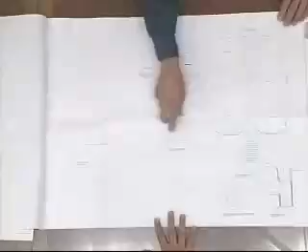And then we went to the deck, which sits out 310, it's 11 feet 10 inches. Here's the detail, but we'll go back when we look at the elevation real quick. My brother and I looked at it the last couple days, and we took Jim's advice and brought the roof out over it. So it's a 6x6 post with 2x picket rails to match the bottom, with a curved rail on top. It's 3 feet 6 high.

As the post comes up in the front, the beam that goes across, we tried boxing out the eaves and it just didn't look right. So we're just going to keep it open rafters on the inside. This beam will probably be like a 4x10, so we wanted it to read like the lower level. We brought it down to about 4 inches, so this beam will just read like 6 inches like the other ones, and it'll be kind of like a 1x piece of fascia over the front of that beam. Then we have the corbels, and the beam stops here, and then you see the edge there. So let's see.

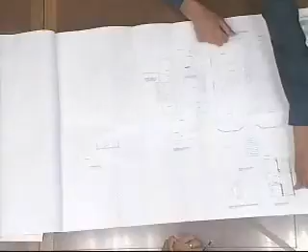Is that pretty much the last sheet on this page? Well, the last couple sheets are just all the elevations and then the solar sheets. Since it was for final, we put in the solar site plan and then the solar elevations for that mod.

If that's all for your presentation, I'll open up public comment. Is there anyone from the public wishing to speak on this project? Seeing nobody, are there any letters? Yes, Mr. Chair, we have one letter of opposition from Ms. Paula Westbury. Okay, I'll close public comment and return it back to the board for questions of the applicant.

Mr. Zimmerman: I think when we're talking about putting the posts in, we were going to try to pick up some detail instead of just the corbels matching, and we can do this scroll work underneath if you want. Yeah, these seem really small in comparison to what we got down here.

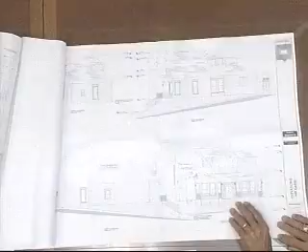Are you going to put one going in both directions? Yeah, actually we've got to erase some. They're really small. I'm just wondering if those could be a little larger so that we can see the detail better. Okay, well we can make them proportional because this is like an 11-foot, and this is just going to be like a 7-foot. I think that's what we sized them by, so we can make them a little bigger.

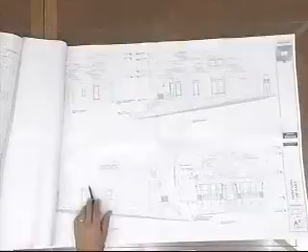Right. I have a question. The bracket that's here, how wide is it? And then the brackets that are here, because these are existing original from the house, how wide are those? 1.5 inches. The existing ones? They're not 3 inches or 2.5? No. He actually, I think he drew - I think he'd dimension them there. That's the bigger one.

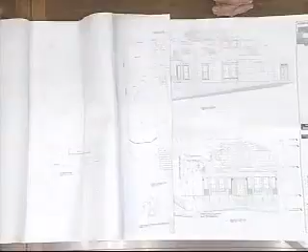Excuse me, there are two different kinds of brackets. There's the lower profile bracket that sticks only forward - that's like 2 inches. But these with the holes in them are 1.5 inches, because I had to recreate several of those that had been destroyed, and it was 1.5 inches. 2x8, 2x12 vertical grain redwood, but it comes out to 1.5 inches, 1 5/8.

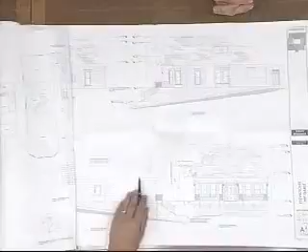I guess I had another question. Looking at this connection right here, the way this is resolved, and the way that this is resolved, and then I go to this point, how there was basically a board, a horizontal board in these brackets. I was wondering if you looked at a way of somehow getting a bracket or some kind of detailing so that this kind of language was happening in this area, or what was preventing you from marrying a similar solution?

Well, we studied basically boxing the eave and pulling this all the way out and then just covering up the bottom - that's pretty much what we looked at. If you see a picture of the house, that's the way these are done right now. But then when we hipped the roof, we took them off, so we didn't box the bottom of the eave.

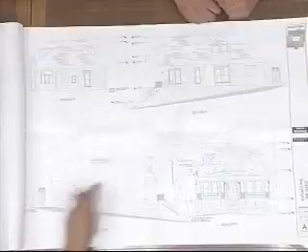Since we have corbels up underneath here, I don't know - we didn't think that it would look right to have one connecting it to the corner, because that's sticking way out from the post. It would be right over here, some kind of element right there, connecting from here to here.

Because we didn't extend the beam all the way across every post inside the corner. Does every corner have one of these? Well, here there's one that has it on 3 sides. So I know it gets really busy and fussy, but you still could have 3 of them right there without it being the end of the world.

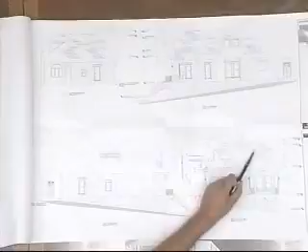But it's more to study and see how it's going to look - that was my question, if you looked into that. Well, we thought about it, but we wanted to stop the beam and just do a typical roof overhang right there, rather than bringing this beam all the way across and then soffiting underneath and putting a corbel there.

Okay, questions from anybody else? How's the sun feature being detailed?

Is that cut out? Cut out of wood, yes. I made the old one. It starts thicker at the bottom, and as it moves up, it just gets thinner. It's made out of the 1 inch board, 1-inch plywood. The rays have a V groove between each of them, with a dark stripe painted down the center. The sun is red, the rays are blue.

It's not painted, it has actual physical relief, three-dimensional. The sun sticks out a little farther than the rays, about 1.5 inches, and then the rays start at about 1.5 inches and then fade.

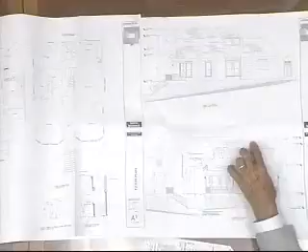Do you have a connection for the post and beam there? Maybe without getting into a metal connector, that's going to make a big difference. Like maybe put a rebar, a drift pin kind of thing. Yes, because it doesn't seem like there's a whole lot of room. We've done that on some older wood columns, but not necessarily on new construction.

That way there'd be no metal connector. Right, the other choice is you go with 4x connectors with the metal stuff, and then you dress it with 1x, and we have to box it out. But then it looks like a finished beam while you still have the structural connection, and that's someone else's call, not ours. Yeah, that would work for the 6x6, we could box it out.

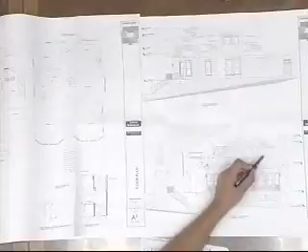One other question I had: sometimes in older houses there's a little plate that happens right here that this bracket rests on, and that's the way the siding goes into that. Does that condition exist anywhere else on this house? The brackets just go right on the siding, or the band board? It goes on this one like that belly band.

Okay, any other discussions from people? We'll go into comments. I do have a question - this has been here so many times, and I can't remember, is the color going to just match existing? Yes. And is there going to be a new roof? There's already a new roof that gets modified to incorporate the architectural changes. Okay, so those are my questions.

Thank you, okay, well let's jump into comments. Does anybody have a comment about the architecture or the landscaping? I think it's a big improvement, the gable coming out, and I think it would have been a mistake to put the flat roof there. Correct. And I like the sun coming out, I think this is a big improvement.

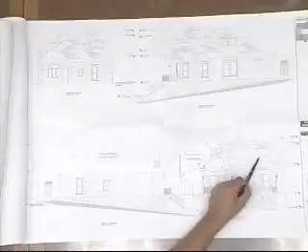Okay, anything from anybody else? If not, I'll jump in. Somehow I still feel this is too small and too diminutive, and having that board behind it, either painted a different color or the same, makes this more prominent. And I think that's a more Victorian detail solution than what you have here. Somehow this is too simplistic - they would have spent more time coming up with something fussier.

True, so I'm going to ask you to come up with something fussier to make it look more like this fussiness and this fussiness. Just because the style of the house has all this Victorian doodad stuff, something has to happen here to be of the same vocabulary, plus this is the front elevation - it's something they can handle at the consent calendar. I think we need a detail here, and we need a detail of the sunray so there's more information about how it's being put together, just for the file. Even though you've already built one, there's not a detail for that.

And is this a bracket right here that happens in the center of the sunlight? Right, it's the same one. Same one as all those. Okay, that's what my eyeball sees. Denise, since I'm looking at the top of the posts below, there's a lot of ornamentation on the top there, right under the brackets, and that would be a nice thing to carry up. We didn't talk about that, but that's what Jim mentioned earlier.

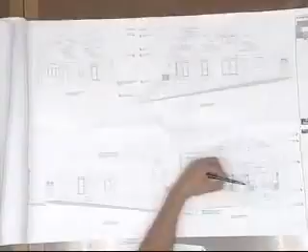The scroll work on this 6x6 beam needs to happen, and it doesn't have to be exactly like this, but there needs to be some similarity. If this is an 8x and this is a 6x, you need to have something that's cool. So you can go crazy and we won't stop you, but it needs more embellishment - those have a couple ripped-in bands and a few holes, that's what I'm talking about, right there.

Banding, ornamental banding, I think would be nice to carry through. We have some good pictures in the file of that. We will match the...

Well, it would be good to have a detail of what that is, or a photograph, so you say my detail is going to look like this photograph, and then the inspector realizes what the final vision is going to be. A photo that kind of captures all that.

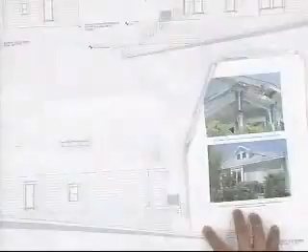Yeah, it was a big one, this one. This on the report, that's what it looks like up close, kind of. That's what we'd replicate in miniature—not miniature, but slightly scaled down. But we're also trying to make it a little bit subordinate to the main front porch as well.

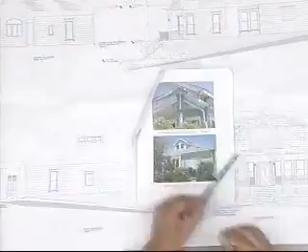And this is a box soffit down here, which is this condition right here. So there's no reason why, even though this is a flat soffit element, you can do a flat soffit here and tie it into the vocabulary of what you're doing, instead of having the exposed tails or whatever you're planning, to stay within the vocabulary of what's going on.

So does someone want to float a motion or comment or question? On the little pads here, for lack of a better way, do you envision them as a rectangular object or more of a heraldic kind of shield?

You can decide what you want. It would be like a 2x4 with eased edges if your 1x4 is landing just on it, round or your 1x. You can go 2.5 inches. It's just something, and then the siding goes to that point versus the siding going through, and then you've got a weird angle.

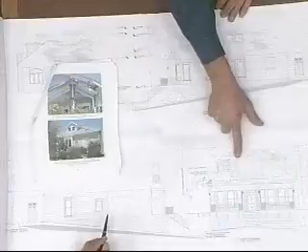Something of that nature. Yeah, we were trying to keep up behind the sun open, so if we box the eave, we have to carry it all the way back—carry it back to beadboard the whole wall, ceiling, just to the beam, to the main wall. So then you're boxing the whole ceiling.

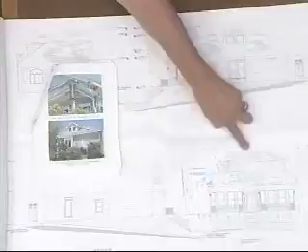And this bracket here doesn't have to have the same thing that happens here, because the sun is more important. I can almost see leaving that out with the sun there, but if that's the case, then you need to put some crown molding in that area to tie that connection. Those are kind of the fussy details we're not really seeing.

Yeah, we were going to put a piece of molding under the sun too as well. That way it kind of gives a little bit of a reveal as well.

Well, let me float a motion and see if this meets everyone's satisfaction. The project is moving in a good direction. Project is to return to consent for final with the following comments: the scroll work needs to be added to the 6x6 post at the upper balcony.

A detail for the sunburst needs to be included on the plans. Applicant is to study adding a backer board to the braces supporting the gable fascia. And applicant is to study boxing in the overhang at the second floor balcony.

Someone want to take credit for that, because I can't? I'll make that motion, that sounded like everything I had written down. Okay Bernie, is there a second? Second by Denise. Does anyone have any comments or changing of the wording to make it sound better?

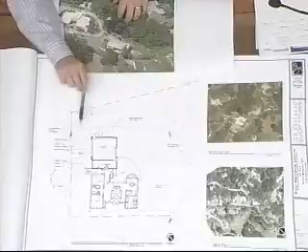Here's our critical root zone, and so the critical root zone pretty much stays outside of the area of disturbance now. So this was the old area of disturbance. On this plan right now, I have the old project kind of overlaid in that light color. And you can see this has a retaining wall and driveway that was impacting these 2 oaks.

So if you don't mind, I'll carry forward that item that staff is to review just so we don't drop it. And if we could, if everything works out today, if we could just have those 2 items, there's a request for a soils report as well, but we're not sure if the project is triggering that soils report. Jaime Limon was out today, so we're trying to get some feedback on that. So if I could come back with those items, if they're still valid on consent, I'd appreciate that.

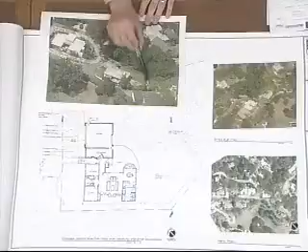Good, so why don't you jump forward? So one of the requests was that we kind of have a look at what's going on in the neighborhood. And as you can see, there's that loop right there, and there's a structure that is right here. This is the site, this is the closest neighbor. They kind of share a backyard, or they're the closest.

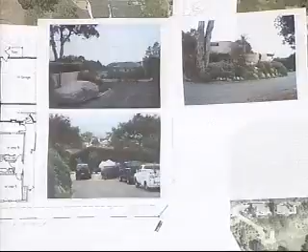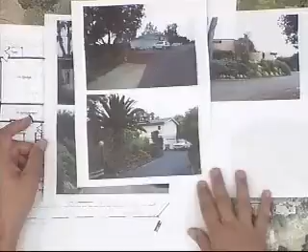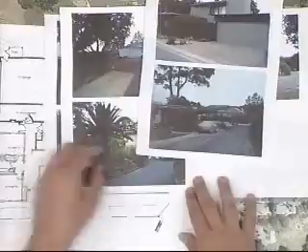From here over, there's quite a large slope before you get to this house, so there's a lot of distance. If you look, it's kind of a flat roof, modern style house. You can see it better in this photo. There it is, and there's the site, looking directly across the street. It gives you a better idea of the architecture in the neighborhood, along with another house that's in the neighborhood. Here's our house again, going up La Cima, and there's the structure right here. So it's an interesting mix in the neighborhood.

Going on to some of the requests on the site plan.

We did study the front yard hardscape and we minimized it. Here's the line for the hardscape, and this is planter, and this is planter. This is a walkway that comes up to a landing that goes into the house. We've been able to change this into a new planter. Before we had this going all the way out to the street, we decided it would make more sense to jog it over and give this area as a planter right in front.

The other question that referred to the site plan was the trash, and there was a request to see if the neighbors would be interested in some type of group sharing location. We studied that. I talked to the neighbors after the meeting, and they weren't interested in grouping the trash in this location, so we're going to stick with this area because it's nicely hidden back behind this.

And then going to the elevations, there's a couple things that were requested, and we studied them.

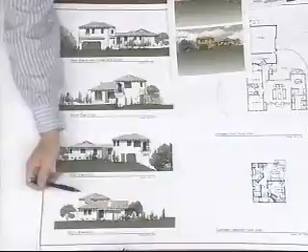On this elevation right here, there was a request to look at this area to see if we could further reduce the mass to have a better relationship with the existing house and the new structure. You can see how we did that on that elevation. We've carried that roof line down over the stairs, but in the area where there's a bathroom, we kept that plate height. It does a nice job, I think, of reducing that mass in that area.

And then we've already talked about the soils report and the arborist report. We're trying to see if there's a need for it any longer because of the reduced scope of the project, significantly reduced scope of the project. Anything else? I think that's it.

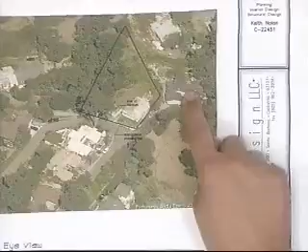Hi, my name is Margie Mainquist. I am the nearest neighbor to this house, and it's really kind of strange, but there was no picture of my house shown among the houses. So that would be my first concern. For the record, this is the elbow. So is this your house, right here? If this is the quick turn, and the garages are going to be here, and this was that flat contemporary one, are you by this easement? Yes, so this is your house, probably not 20 feet. Oh, so here it's down here as well. Okay, it's just so we all know where your house is. So one of the requests I had last time was to know the elevations of the roof line, which is still not clear. And that's the big concern, because on that side, everything was going to be blocked before, so it would be really helpful to see where the south elevation of the roof line is.

I still think it's critical that this board addresses the two issues around parking. As you saw in one of the pictures, there must have been 4 or 5 trucks coming down the hill, right at the edge of where that house is. Big trucks, cars parking - it's really an issue on that road, and there's no parking in front of the structure. Finally, the construction issue - there's a small turnaround, so the neighbors are interested in how construction will be handled in terms of trucks and parking, because it's a private road and we pay to maintain it. That's our concern, thank you.

Is there anybody else wanting to speak on this matter? Are there any letters? Yes, Mr. Chair - do you have a letter of opposition from Ms. Paula Westbury? Okay, I'll return it back to the board for questions of the applicant.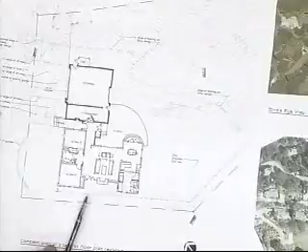Same question for the door coming off the living room - is there an existing patio on the south side, by the dining room? There is an existing patio, it's just not shown on that plan, and it's very small - just what's underneath the overhang by the fireplace. And on the east side - is this a door here? That is not a door. There is a door there currently, but it will be removed.

Questions from anybody else? I had a question about the elevation - the one with the turret versus that version, if you can put that up. Which does your applicant prefer? We asked you to study it because one board member had a concern about it being heavy and massive. You did what we asked, and in the process the owner fell in love with it? I wouldn't say the owner fell in love with it, but it does save a little bit of money. What we talked about with the owner is that at final, if there's a real emotional attachment to that element, we'll have the opportunity to bring that detail back, if the board would allow. That's all the questions I have.

Mr. Chair, before comments, let me justify this mostly for the neighbors regarding the parking question. This property is a single-family residential unit, so the only parking requirement is a two-car garage, two-car covered parking. We understand there's no street parking on the street, however they're not required to have guest parking for a single-family residence. Actually, the zoning ordinance discourages and does not allow parking in the front setback or front yard. Transportation will review the garage dimensions and ingress into the garage, but that's all we can do regarding parking configuration.

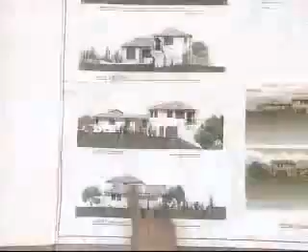I'll jump into comments. The neighbor made reference to the south elevation because this is the elevation seen by her on that private easement or the driveway. The course of construction is on the opposite side of the existing house. I want to say it's not an issue from our board, even though it is a concern for her. The house is, I want to say, a small addition, a small improvement. I don't sense it as a problem.

And I go back to where the house is. Her house actually is here, in the location of the garage. It's so far away, I don't have concern. Yeah, I agree, it's not right on top of her and all these other things. There's so much distance involved that it's not something we should be scrutinizing and be concerned with. I think the two-story, being on the other side of the house, I don't think that height is going to have any impact.

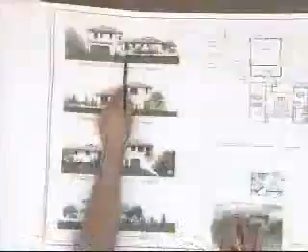The other interesting thing is that it's a semi-split level, in the sense that the garage is like half a floor down, or 4 feet. So it's really a story and a half, not a true two-story, and that is shown in the elevations. That's what we as architects can see in a set of drawings, when we see the elevation up here and the garage is lower and this is up. That also diminishes the overall height of the structure when viewing it from this eastern or southern side.

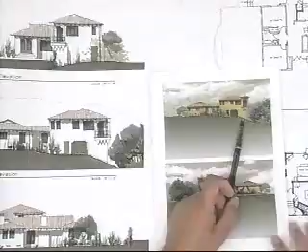The issue about the tower, I happen to be like Mr. Zimmerman, and I like the fanciful funness of it. I would encourage you folks to go this direction if that's what your owner wants. It's a way of him personalizing it for himself, and that brings him joy. What I wanted to point out to some board members is where that's happening in relationship to the property. It's so far back in the corner and far away in the interior part of his property that it's just a fun little pop. Anything we can do to encourage a person to personalize it for themselves makes them happy, and it gets architecture outside of the ordinary. So I would go back to you and your owner and ask them, but thank you for looking into it because that's what we asked you to do.

And the other comment I was missing, Aaron mentioned about the patio over here, to have some additional notes. I was thinking we need some type of notes about the connection, stepping stones or something.

From my experience, if you're doing a second-story building, you will need to do a soils report, period. If it was one story and less than 500 square feet, you might be able to wiggle around it, but you are doing a two-story structure that will require a soils report. The concern wasn't about the soils report, they were requiring a soils report prior to preliminary approval. Have you ever seen that before? Yeah, unless you have known landslide areas, but that's a city planning thing then.

Okay, sure, Aaron. I guess I'm sort of with Denise on the tower. That's fine, the new design is more simple, diminutive, classic Santa Barbara design to me. What I was going to say about it is instead of this ironwork here, which seems unresolved, maybe there should be a wood post there. Might help.

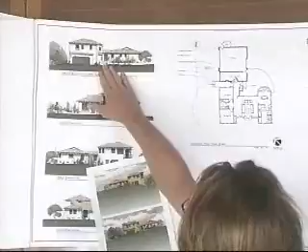The other comment has to do with the front walkway. I like what I see in elevation here with the two columns like that, however they're turned 90 degrees on the plan. So if there's any way to have this walkway meet with the road, I think that would be a benefit. We could do both, or meet — yeah, you'd probably want to do both.

If Denise, you want to go? Yes, sure. I actually have to go back to a question.

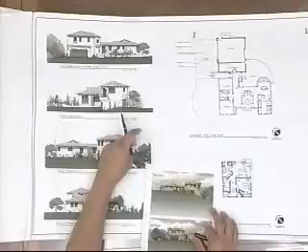I'm curious about this curved area on the same sheet. Can you point right there? I'm not understanding it well, and it looks like it's in the middle of the road, so it's existing. It's existing, and the road actually curves away from that center line. I see, that's where it makes that hairpin turn. Is this a wall, or is it a retaining wall? It's a retaining wall, about 3.5 feet tall. Okay, thank you.

Are you proposing any fencing between this road and your house? There is an existing fence that we'll probably repair. Is that noted on your site plan? It is not.

The question now is, does the board want to see this one more time, full board, or move it on to consent for preliminary? The issue is about the tower. We're kind of semi-split on how we want to approach that between the four of us. That would be one reason to have it come back to full board. Okay, then that's it. I'm not really a full board.

Yeah, we're missing 2 members, so let's make a motion for an indefinite continuance back to full board with the following comments. Does someone want to make them? I had them written down, I'll make them. The first one is the applicant is to review the turret design with the owner to decide which direction the owner would like to go and present that to the board, so you don't have to change things after preliminary.

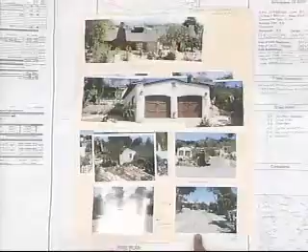Well, I'll start at the bottom. That's Sierra Street. There's Sierra Road, Sierra Street. This is Sierra Lane or Sierra Hill up above it. The front of the house, you can see there's a living room. The structure on the left is a living room that I did 2 years ago. The two-car garage I did a year ago to move it back into the setback.

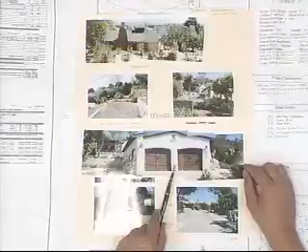To the right of that is the east neighbor, and you can see the hill behind. Those houses are approximately 50 to 70 feet above my existing house. It's very steep back behind my house and back up.

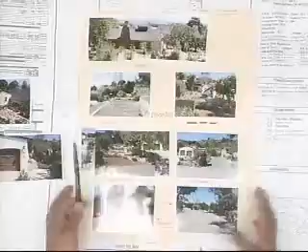The top view, the back of the house, you can see that this existing portion on the left is the old board and batten style of house.

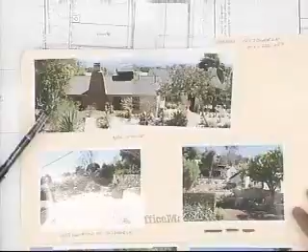The reason I have this picture of this bedroom is to be saved, and that's where that little chimney is. That little bedroom area is about 3 foot above the existing level of the existing house, so an addition really can't come back and set on top of that.

To the right of that, you're looking at a roof, and this is a living room that I did, and these are pictures of that from the inside. Needless to say, I just did that 2 years ago, so I don't want to tear that ceiling off and build on top of that.

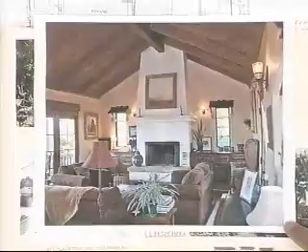So if we get back to the plans, you'll see from looking at the garage, my plan is to come back on the garage, start a living space there, and then go back farther to reduce the bulk and scale and size, and add a master bedroom to the back of that.

Well, let's go take a look at the plans then. I think we got a good understanding. This way, if someone's interested.

Here's one more picture that might help. This is a model that I did when I started on the project.

This garage was down on the very front of the project in the setback, not up to code. Just everything was wrong with it. So it got moved back here. This was done.

So what I've done is I'm moving back off the garage, then having a porch to take advantage of the views, and then stepping back again with the master bedroom in the back, so that at this stage where the garage is, it's about 1.5 stories on the first floor. The tallest part is just a small section of about 5 to 8 feet back here, where it becomes 2 stories plus about 3 foot of crawl space underneath there.

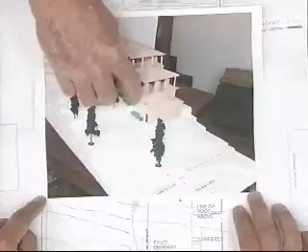On the other side of the house, the steps just follow the terrain right on up, and so you lose this depth, and it just fills itself up right to what will be the front door on the other side of the house.

Great. You're going to put us out of business. It's a good model. My cat likes it. Okay.

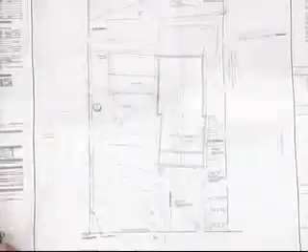So your setbacks here. Right, 10 foot on the side, 30 on the front, and 10 on the back.

Demo plan. This is proposed first floor.

This is that photograph of the chimney that you showed us. Yeah, right, this is the existing family room. This is that small bedroom in the back, and this is the existing fireplace to remain as well.

Yeah, this exists, and if it helps, what I'm doing, this is how it sits now, the existing that sits now, this being in the setback. Basically, I want to, well, as you can see, it's a little galley kitchen, a little bedroom, and we use this as a dining room.

More or less just turning this way and then expanding it to bring the size of this, this is the existing house that's being demolished. Yes. So when it's all removed, this is what you have left. Yes, okay.

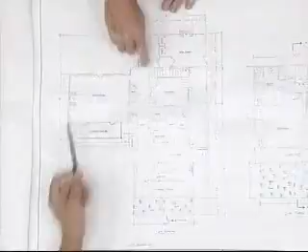Okay, and your stairs, you start your stairs up here and you go around? Well, this, from the main level, we come up this way.

This area is about 3 foot above this. Okay, and then from there, it will come up to the second story. So that comes up to this point, and then you get into this bedroom area. Yes, okay.

Look at the elevations. Okay.

Do you happen to know what the overall height is from the face of the garage door to this eave? Oh, shame on me. I can add this up very... Basically, it's 10, 20, about 30. 34 feet. I would say 30 feet. That's 34 feet. Okay.

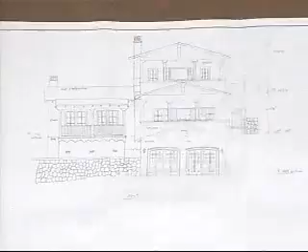This is the side facing, this is the existing part that you've already built. Yes. And this side faces the property line. Right, comes on up.

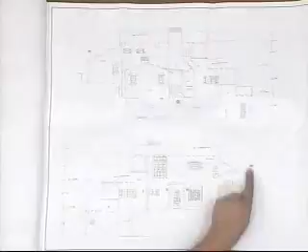And this is the existing house that remains and the existing fireplace. And this is a section.

Okay, I think we understand the project. Okay.

Mr. Chair, if I might just make a comment, might want to look at that a little more closely. I don't know how they're, it's really even though it appears from the street to be 3-story, that it will indeed be a 2-story house, the garage in front. But I just want to confirm that the entire overall height of the building is a maximum of 30 feet, because that is the maximum allowed for a single-family residence.

Let me get a drawing real fast.

If the camera can zoom in on this drawing, the 30-foot limit is based upon the existing grade or the altered grade. We also look at the apparent height of the overall mass, but the 30-foot is not required for the apparent mass. In this case, it's 27. This was 37, 27, 37. We want to minimize it, but it's not an overall limit. We've approved projects just because of the hillside and things stacking back. We just don't want to see a huge elevation that's 25 feet above grade. So there's a little bit of play in there, and he's at 34 feet.

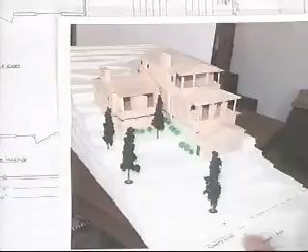Anything else from staff? Okay, I'll open up public comment. Is there anyone from the public wishing to speak? Seeing nobody step up, do we have any letters? We do have a letter of opposition from Ms. Paula Westbury. You have archive drawings there for any particular reason? Just for reference, if you wanted to see them. Okay, good.

Does anybody have any questions for the applicant? I'm still trying to get clear here. So looking at this photo, you're demoing this entire section, the board and batten section of the house? It will become stucco, but this section stays - that's an existing bedroom and bathroom.

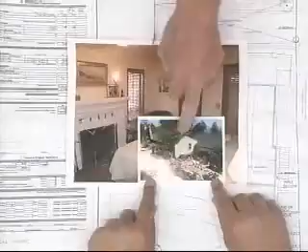If I didn't show you the pictures from the inside - if you don't mind, can I put these two here for the TV camera to zoom in on? Is this the bedroom we're saving, and that's the fireplace we're saving? Yes. And this is from the exterior - yes, that's this area here. And this is the existing one-story that you showed us the other photograph for, that we're saving? Yes.

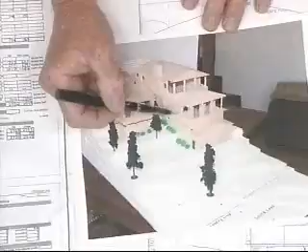Mr. Chair, can you show us where the roof deck is? Well, it's on here - let me go to this sheet. Thank you, yes, this is a deck here. That would be the deck off the kitchen dining room, here.

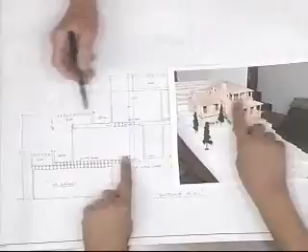Is that what you're calling the roof deck right here, or is that another one? What we're going to do is go back to the sheet she's looking at - it's A6. Here's the garage, and then he steps back to a covered roof, which is right here. And then there's this room, and then there's another upper deck, off the bedroom up here. This was 30 feet back, so this is about 34, and this would be about 45 feet back, because if this garage is 20... 24 feet, so you might be 50 feet at this point.

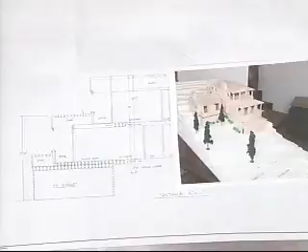That's a good question. Questions from someone else? I had a question - how do you get to the front door if I was a guest? Up to the right-hand side of the garage. Can you show us on the site plan?

Yes, it would come - I have these existing steps here, and steps here that will be remodified with the addition, and it will come up over here. So the actual front door is somewhere right over here? Yes. How does it look in elevation? I guess I missed that - oh, there it is, yes, it would be here.

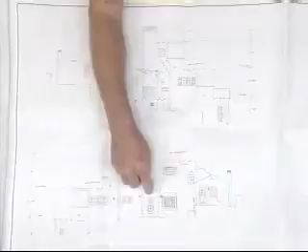And to break up that mass, the building steps back here about 13 inches to keep it in the setback. Then I plan to set the door back a couple of feet, do a little eyebrow, a bar window in front of this window, and then do a little 18-inch overhang, the all-wood look to the window here, to just break up this whole area. I'm going to go to the plan real fast so we can see that.

So here is that break, and here's the front door. Here's that eyebrow, and this is your bump out. Yes, at the bedroom, second story.

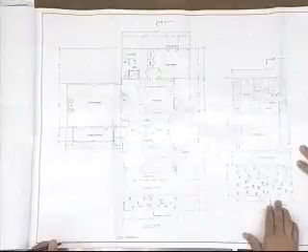Any other questions? Did you look at having the front door in the middle of the structure, coming up the left side? Oh yes, when I originally designed it, that was my idea. But if we would jump back to this page, A4...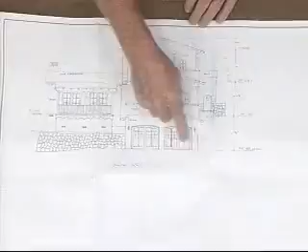So to follow up on that, is there any way of getting from this main level to this front landscape area, or is this landscape area only accessible from the driveway location? Do you understand my question? Yes, that would be accessible from either this side of the house or out the back door and back around. So there's no stairs, no door on this mid-level that comes down to that front little level? No.

Okay, any other questions from people? If not, we can jump into comments. Who would like to go first?

I have a few comments. Miss Bernie. Okay, thank you.

I'm having some concerns about the size, bulk, and scale of this project, because even though it reads 77% maximum, it's really a lot bigger than that. There's a lot of uncounted covered deck areas, a whole lot of them, and they really add to the bulk of what the public is going to see from down below. I haven't seen the landscape plan—that might offer some mitigation—but it still seems like we would want to see some further reductions in the size and the height.

Questions or comments from somebody else? Mr. Chair, I'll concur with Bernie. I don't think it's the square footage, it's just the way the building's massed. The decks do contribute to some mass in the front, and I'm having concerns with how the new is blending with the existing—it feels like two different buildings almost. The apparent height is a concern I have as well.

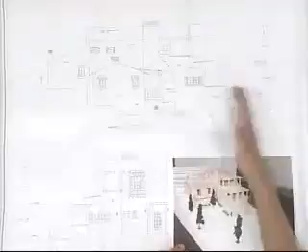Comments from other people? If not, I'll jump in. Mildly, I have a concern with the bulk, but not a lot—the model does a lot, it says a lot about the architecture. The one thing I'm looking at is this covered roof area. If that became a slope going the other direction, following something like that, it will bring back and soften this edge. I went to the site today—you're 30 feet away, you are so far back. I'm not too worried about the trickling down because it's broken up really nicely in the design.

Architecturally, this floating area here was mildly concerning, but since you're not going to have people coming through, it's on the interior side. I don't quite understand all of this, even though you explained the crawl space access and things. But I think softening this covered roof area, or just making it a trellis or a flat trellis, flat roof area, would help on the front massing.

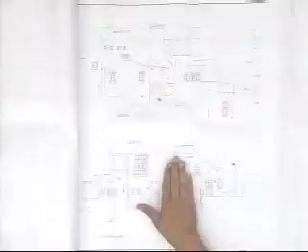On the front elevation, I agree with Aaron that something's not quite right here, and I didn't quite study it enough, or maybe it's not right. The marriage between the building you want to save and the new building—I didn't study it enough to say, but it looks a little funky, and I'll leave it at that. The front elevation—the one thing that's missing is this elevation moves in 15 inches. Yes.

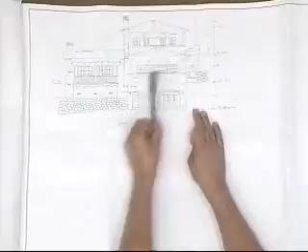But I noticed your post over here didn't, and the wall did beyond. It actually might help the elevation if this comes in and this is a little bit wider, even though you lost 15 inches of your balcony. I'm just sensing this straight line is kind of getting really hard. Yeah, the 15-inch setback is actually back here, and actually I should not have that line there. This should be there.

I'm noticing there's something not quite 100% right here, and I was comparing the two. That line should not be there. That actually is a setback.

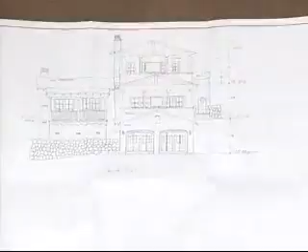But I can tell with what you have already done in the house, detailing-wise here and here, as your photographs, it's going to be very well done, articulated nicely. I'm not too concerned about the massing, just because this is a gable end and it doesn't have to be a gable end. It could be a softer end or a different type of trellised roof up there, which will really help push that back even further.

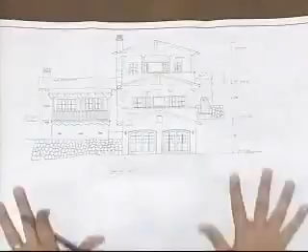So those are my comments. Do a hip out on the end of that. Though that's my comment, but I'm only one person. Yes, I mean, it could even be just a straight flat roof, not even a hip.

Comments from other people? Yeah, I think the hips would be a big help, even on the lower deck area, down here too. Yeah, because right now the gable's adding a lot of height.

Yeah, it was gabled everywhere on the existing, and I kind of stayed with it, but the transition from the new to existing in the back, it's on the side, you really don't see it that much. It'd be different if you had a lot of exposure to it. But I think the hips would be a good change.

Okay, Aaron, do you have anything else? Anything you can do to make the second and third stories, I'm just calling them that, read differently, make them unique. Maybe some stone on the second story, carry that over from the front.

I'm just saying this stone here, maybe I can carry over into this wall, or just break up all this stucco. Yes.

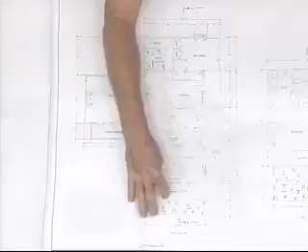Yeah, one of the hip things, of course, is to try to get back, to give me room to get that hip to come up here and not have it crash up. Try to get all the points to come together here.

So, well, this is the garage roof, and that already exists. Yes, but this one, you might be able to make a 45. Yes, very easily, and it'll work just fine. And then the roof up here won't be an issue either, the one that's over this.

But I look at it as if I was the owner of this house and I lived here, standing at this balcony, I'd want to go down and see something. So I would think a staircase coming down here would give life to this front patio or the front landscape area, because it's really important - you're paying taxes on it.

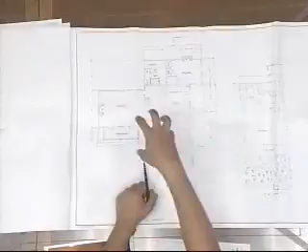You might as well use it and drink your wine or something. But then that would be a way of resolving how this fireplace cantilevers out and is just hanging there. That's what I'm sensing in my mind. You might not see any need for that, but I say it's an opportunity to have some interaction between these 2 levels. That's just something for you - it's not on the motion.

Just to follow up on that, I'd really encourage you to look again at having the front door in the middle of the project. If you have to meander the steps around to match your grade, it's really beautiful - for 3 years I've looked at trying to do that.

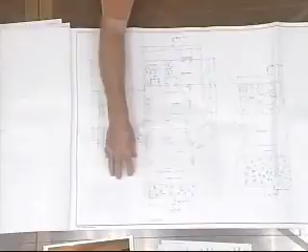That's exactly my thing, I wanted it to come in there, didn't want it to come up on the side of the house. But if you get out here, right about here is that 3 to 4 foot wall, which brings you up 3 or 4 feet. Now you're still 3 feet short - it's just a big mass of steps to get there. It's encroached over into here, and you kind of have to be there to feel it. But I'll look at it again - I've done it in the model and tried to make it work, and then I've just... but I will keep looking.

Okay, Denise, point of clarification please. When you're talking about changing the roofs from gable to hip, are you speaking of the existing area? That's the hip, right, and so you would extend that across the face here on the second story. We wouldn't touch any of this part because that's the existing one story, but the new part here he could make a sloped roof that goes back.

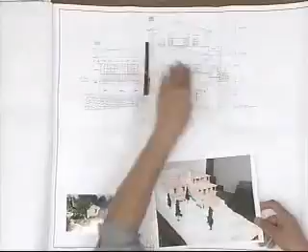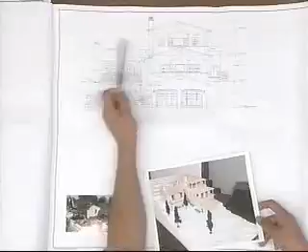Yes, because this was 12 feet and this is 23 feet wide, he can easily get a gable end right here, or a hip roof here. This garage stays exactly the way it is because there's only 6 feet between these planes. Then up here he can also put a hip without a problem. Or, the choice I had was to keep it as a gable end and make this a flat trellis that comes across.

Okay, Mr. Chair? Bernie, and then we'll wrap it up. I just wanted to ask if you've reviewed this design with your neighbors, or if any meetings have taken place. Oh, yes.

They were so happy to see me buy this house about 5 years ago. It was in major need of repair, and I've worked with it. The neighbor to my east has an approved set of plans for a house of this size, bulk and scale. I originally got this property because I was friends with the owner of that property - he wanted to build his and wanted me to build his, and then I was going to redo mine, but his has kind of been put on the back burner. So he's happy with this, and the other neighbors are glad to see an improvement to that section of Dover Lane.

Okay, thank you. The people behind - if you look at the photographs - are, I'd say, 50 to 70 to 100 feet up above us, and I understand they will be happy. When it gets done it'll be a two-piece mission tile roof and everything - it's just asphalt now, and I think they would be more than happy to see that.